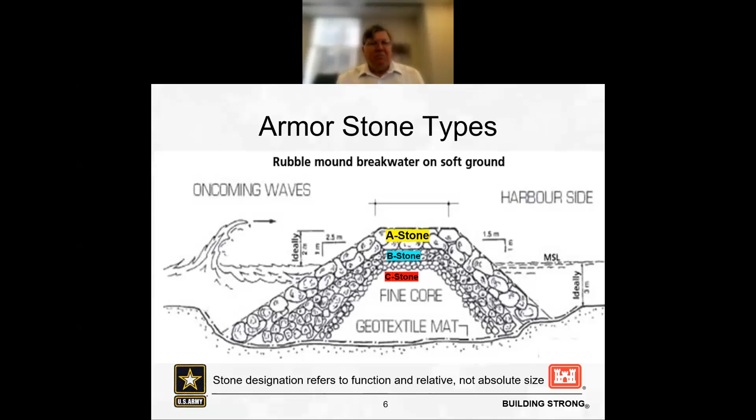Again, A stone is the outermost armor protection. It's the largest stone in the structure, and size and gradation is designed based on Hudson's equation and ice conditions in northern climates, because ice can be an impact on structural stability as well. And the durability is critical because that's the stone facing the most severe environmental stresses.

And the general assumption is that quarries that produce good quality A stone can readily produce B stone or C stone, but the reverse is not always the case because the largest stone has to be free of discontinuities or weak zones that can break down the stone into smaller size in response to environmental stresses.

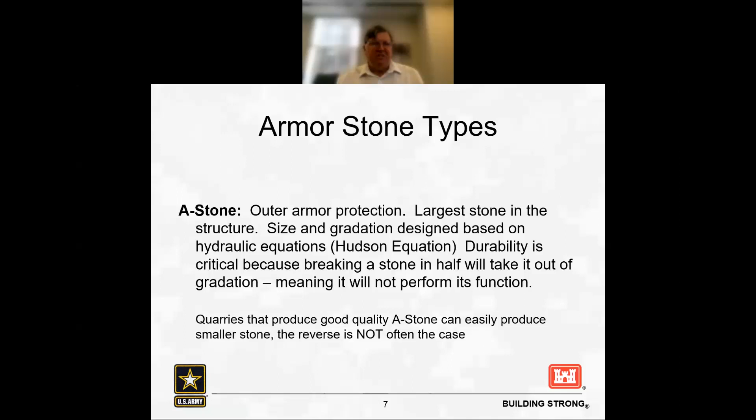Yeah, that's a good idea. I'll put it in the quiz at the end. No, there's no quiz.

B stone is placed as a transition between C stone and the outer layer of armor stone. And gradation is designed using filter compatibility concepts to prevent the C stone from washing through the large voids in the A stone layer. And some B stone sources produce small quantities of larger A stone as a consequence of their production processes, but they don't produce a lot of it.

Sometimes, if they have out of size stone, they'll set it aside and eventually accumulate a large enough stockpile to actually compete market-wise for jobs of appropriate size demands and quantity demands that they've got stockpiled for.

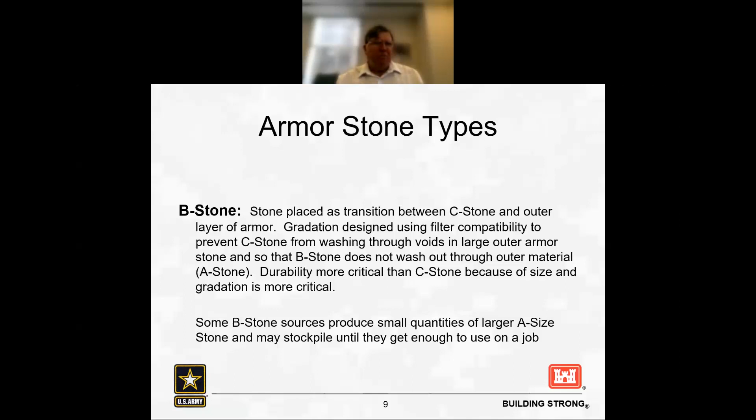C stone is the core stone. It's the base of the structure against the foundation, and it's often riprap sized or slightly larger, not subjected to direct wave action or major current impacts. And it's, like I said, transitional between foundation materials and overlying B stone. Durability is important, but not as critical as in the outer layers of stone because it's not subjected to the same stresses. And C stone sizes are equivalent sometimes to larger riprap stones.

Sizes used by state highway specs are often used to make it easier on suppliers that are used to producing larger quantities of stone for highway department contractors, so that they don't have to reinvent the wheel as far as their grizzly settings or their eyeballing gradations in the quarry.

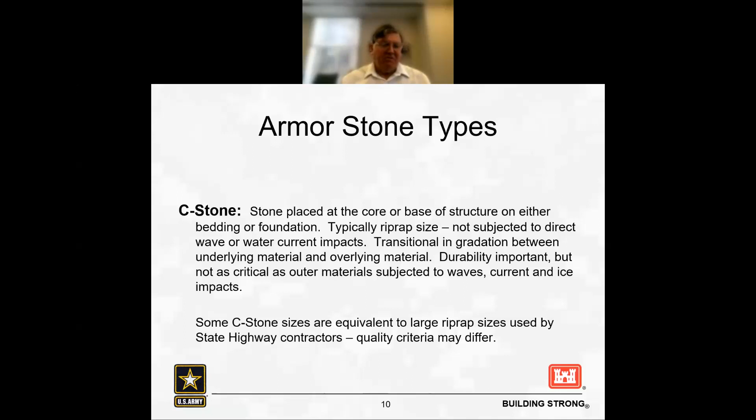Other materials that are related to these: riprap is more commonly used in non-coastal districts along riverways or smaller lake shores where wind may cause waves that erode shorelines. Fillstone is oftentimes not as strictly specified in terms of gradation. It has broader tolerances for stone size gradations.

Ecosystem stone for habitat. Typically, we use rounded stone for creation of man-made ecosystem enhancements where we make riffles in streams or provide aesthetic features in adjacent areas. And then there's concrete aggregate, sand, and clay fill that are sometimes byproducts of quarry operations or primary products depending on the deposits.

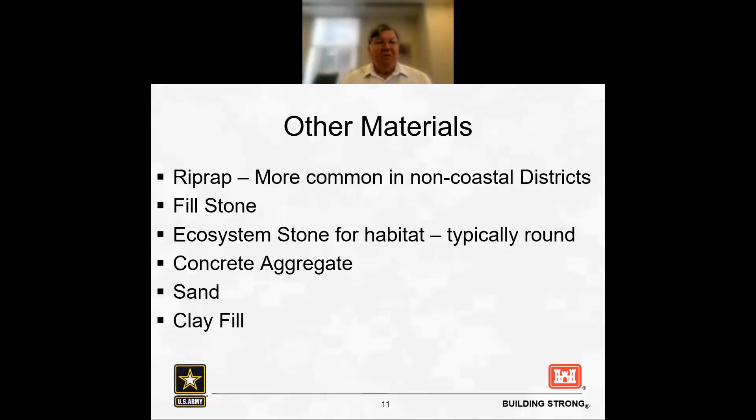Stone shape is important in terms of armor stone use. We want stone to be relatively angular so it interlocks tightly, so the slopes are stable. And for that reason, we go to something with an aspect ratio of 3:1, which is basically the longest axis can be no greater than 3 times the shortest axis. And those axes are generally the longest dimension and the shortest dimension of the stone.

Ecosystem stone for habitat, again, typically rounded with specific dimensions to create habitat for streams. Doesn't have a lot of the same criteria as armor stone. Sometimes we try to reach a happy medium between the two, but for armor stone, we oftentimes have relatively steep slopes, sometimes up to 2:1 or so. And that's simply not possible to have a stable slope using rounded stones.

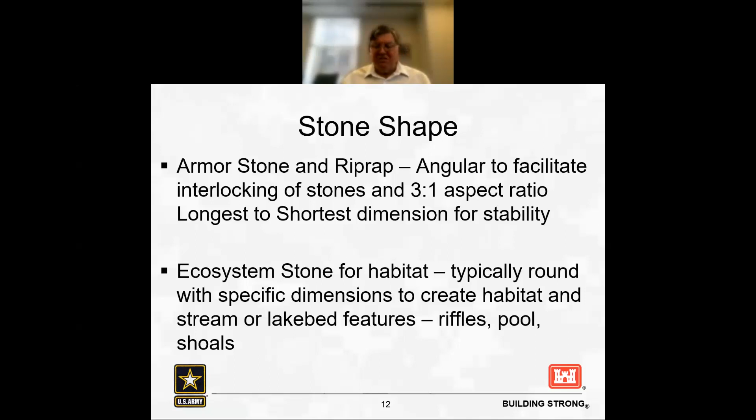Stone contract types are important to consider. Excuse me. We have general construction contracts where armor stone may be part of an overall contract for construction of a shoreline feature or a shoreline revetment or breakwater, but there may be other elements of the contract. Construction contracts can either involve a lot of different things or can be specific to use of armor stone.

But those construction contracts include furnishing, transporting, and placing the stone. And those contracts are written up as a construction contract as opposed to the next type of contract.

Stone supply contracts are written so that we can purchase armor stone that the Corps of Engineers internal maintenance crews will use to repair or maintain structures within our districts with our own equipment and manpower. And so those are just basically stone supply contracts, like we're buying a raw tonnage amount and we'll have it delivered to either a stockpile location, a stone dock along the lakes, or delivered to a project where our crews are actively placing it on a structure.

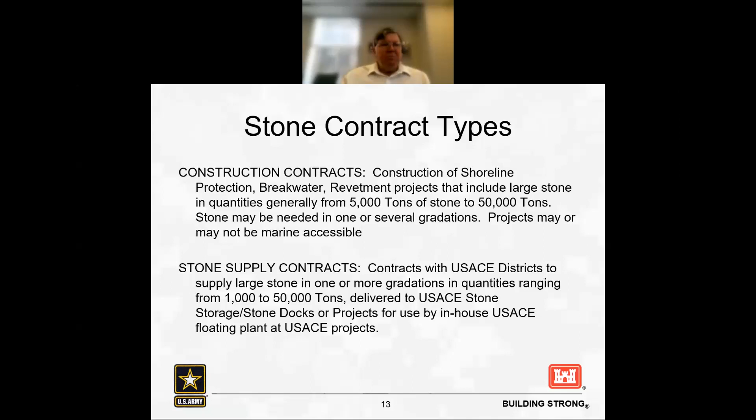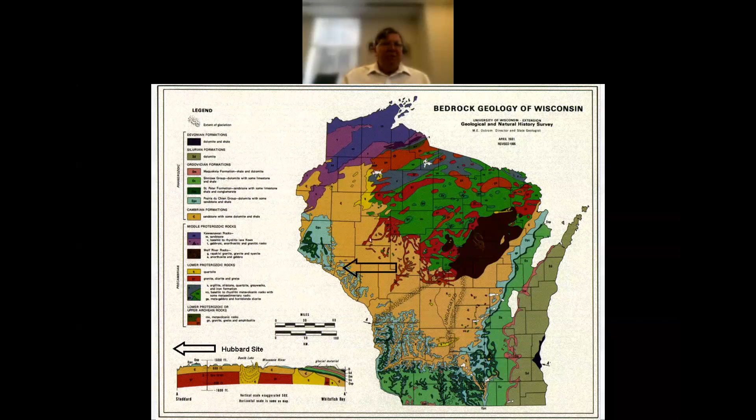And up in the northern part of Wisconsin, we get into what geologists refer to as the greenstone belt, which is some of the very oldest rock on Earth. Some of it's over 1 billion years old. And there is very dense, very hard crystalline rock in those areas. So we have a wealth of different geologic materials available to us from a resource standpoint in the upper Midwest. And it just depends upon how they are developed by quarry and resource providers as to how good that works out.

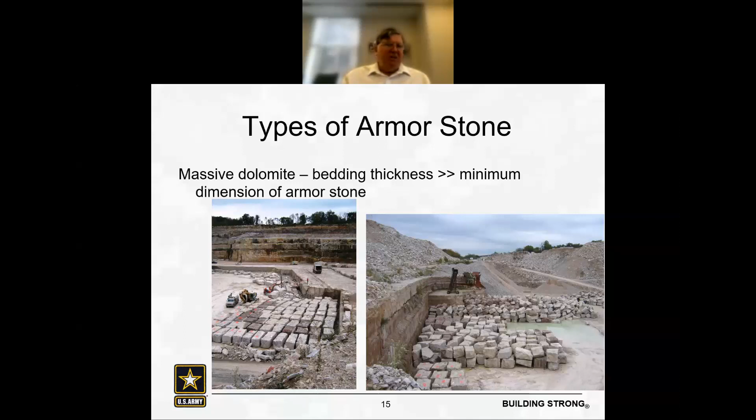We have several types of armor stone we use. These are examples of dolomite, massive, very thick beds of Silurian dolomite in the upper Midwest, in the carbonate deposits. This is from Hayton Quarry, I believe, about 20 miles west of Manitowoc, Wisconsin.

We have different rock types available, like I said, but we still have to have rock types that are free of discontinuities or planes of weakness or weathered features. We prefer, if we're using dolomite, to have it massive with thicknesses at or larger than the minimum dimensions of armor stone, because those bedding planes are going to be planes of weakness along which the stone will break, either during blasting or excavation, or during placement or transportation, or over time in the structure.

Crystalline, or what is colloquially called hard rock, granite, quartzite, andesite, or metavolcanic rock, are rock types in Wisconsin that we've used that are of Precambrian age. They include, like I said, granite, quartzite, and the metavolcanic rock in the greenstone belt.

Some sandstones may be used for armor stone if they're extremely durable and don't have a lot of weakness planes, and some what are called oolitic limestones, typically referred to as Indiana limestone, because they're predominantly quarried in southern Indiana and are used for things like doorstep architectural stone, because they're easily carved and have a somewhat gritty surface texture that's safe to walk on even when it's somewhat wet. But that stone tends to be softer, but it still can be fairly durable in environments where abrasion is not as much a concern.

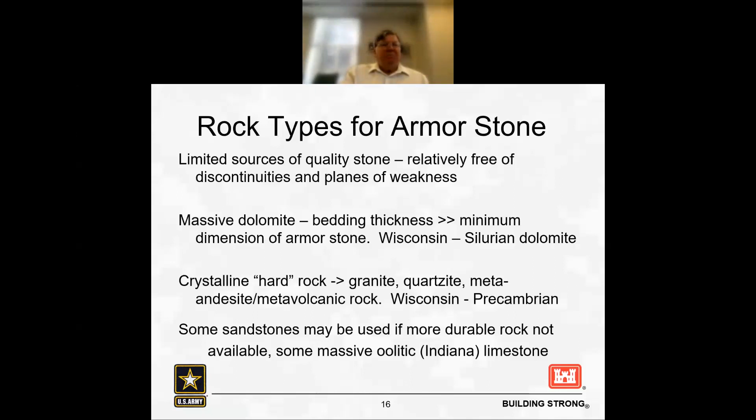Control there. Whoops, something happened here.

Some stone, in addition to being blasted, is cut to size for armor stone. Large cable saws or mechanical saws are used to cut stones that are beyond the 3-to-1 aspect ratio tolerance, or are just simply too large, and were quarried in such a way that you have less blasting impacts, less cracking, less fracturing, and so forth, and they cut them to size. That's a time-consuming process, and the equipment is not as readily available as drill and blast equipment.

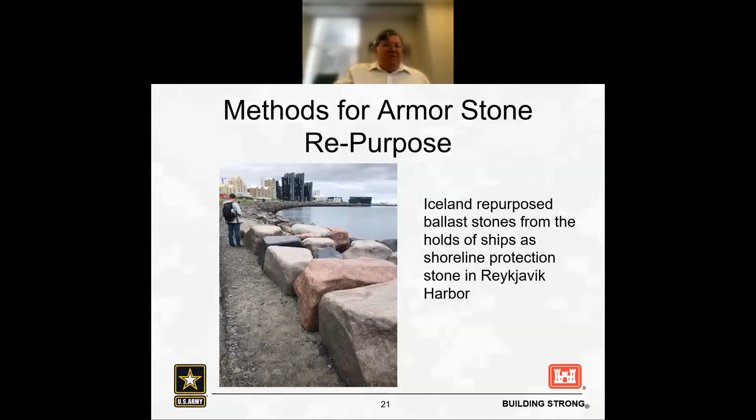Stone is tested in labs for a number of different physical parameters that we use. Laboratory tests used to determine the durability of stone we require come from Corps of Engineers validated laboratories. We have a couple of labs ourselves, but we also permit stone to be tested for our use. It's tested in private laboratories, but the labs have to be validated by our materials testing center.

And there's a list online at this website of laboratories that have been validated by those folks. The website has a listing of laboratories nationwide, listed by state, so you can search by state and find out what laboratories are available in your area that have been validated.

For decades, the Corps of Engineers had laboratories all over the country in its own districts, as well as using private labs. At one time in 1980, there were over 200 lab technicians in the Corps of Engineers itself that did testing all over the country on soil and rock for projects when we were building lots of dams and levees and coastal projects.

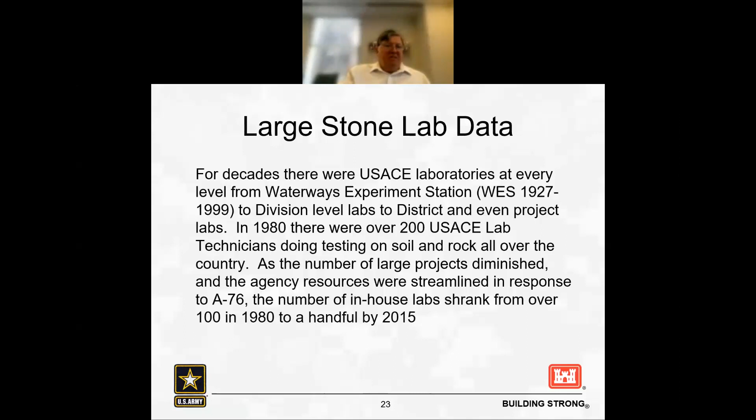Then as the 1980s went on, fewer and fewer large government contracts and projects were being built. There was also a program under the Office of Management and Budget called A76, which was a reflection of political beliefs that the government shouldn't be doing all this testing and that we should turn a lot of that over to the private sector. So the Corps' number of labs shrunk, and a lot of this work was then turned over to private laboratories, and the numbers diminished accordingly.

The Corps of Engineers, up until the very late 90s, had a research center in Vicksburg, Mississippi called the Waterways Experiment Station. And they had the oversight authority of certifying laboratories both within the Corps and validating laboratories in the private sector. They also were responsible for cataloging all the data from these laboratories on materials used in Corps of Engineers projects, whether it was clay, sand, all the way up to armor stone, concrete aggregate, erosion protection, and fill stone. They had massive collections of data every year, and that was compiled by an office down there in Vicksburg, Mississippi.

There is no current agency-wide database identifying sources for Earth materials. There used to be a system of cataloging based out of our Waterways Experiment Station, but in the late 90s, they closed the Waterways Experiment Station, and it was reborn into something called the Engineering Research and Development Center, which had a different laboratory function that, instead of having an annual overhead budget to operate, was operated on a project by project basis and was funded entirely by project funds. So it became less consistent in terms of its manpower, and also a lot of the functionality of the original laboratories fell through the cracks.

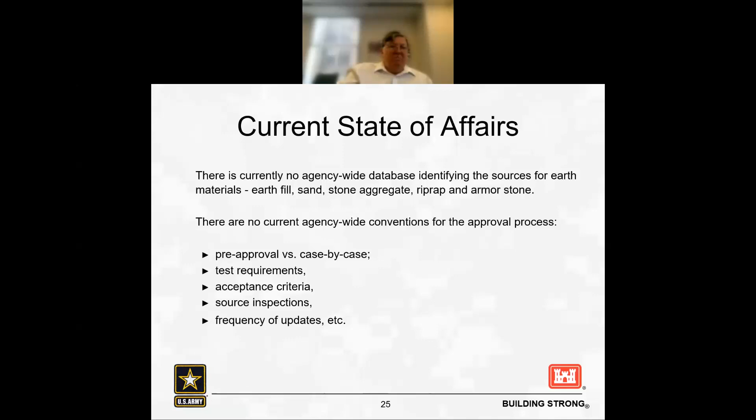And in the Chicago district and in some of the Great Lakes districts as well, the general procedure is that materials are approved on a project-by-project basis because individual project needs vary. Those specifications will include the test requirements, the acceptance criteria, and a process by which we conduct source inspections, and also may include by policy updates to material inspections and testing if necessary.

There's an evolving problem within the agency and within agencies in the government that build large projects. There's a fluctuation in technical expertise within the different levels of our bureaucracy, and we've relied intermittently upon input from the private sector, labs, AEs, and universities, and we also have developed centers of expertise within the Corps of Engineers.

Institutional knowledge and expertise was lost in the 90s as Waterways Experiment Station closed and many of our division laboratories closed, and we downsized as an agency in terms of the technician and laboratory testing, and senior people were retiring and not being replaced with personnel at the same functional level. So we had a brain drain, if you will, as well as a technology drain at the testing level.

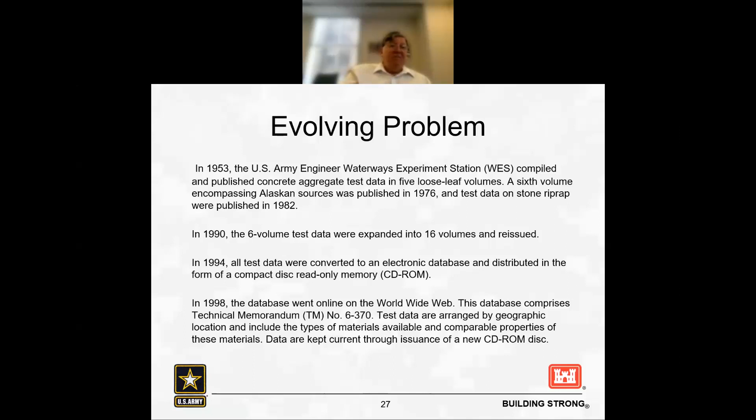And the binders were such that every year the Waterways Experiment Station would send updated test information for each source that they tested. They're, again, drawn out by the 16 volumes by geographical region, and they included aspects of transportation, local knowledge, and similar geology. The reports within them contained a map showing the location of the project, location of the source, and what types of materials and what the test results were for those materials.

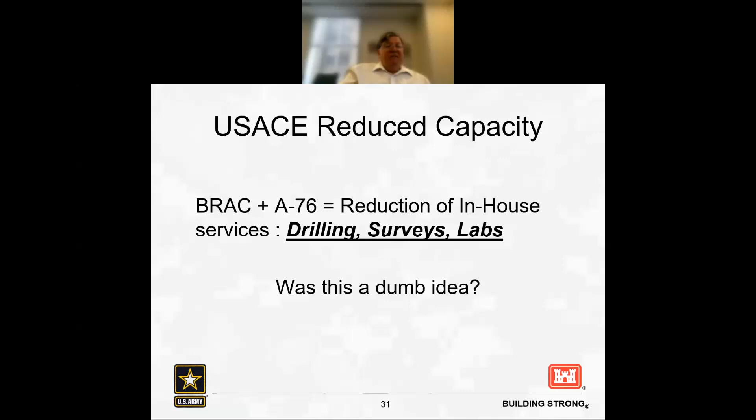And in the late 90s, the combination of the application of A76, which reduced the in-house services of drilling, laboratories, and surveys, along with what was called the BRAC program, the Base Realignment and Closure Program, that reduced the numbers of divisions and districts in the Corps of Engineers, and also the number of military bases. And it cut down a lot on the institutional knowledge within the agency. And the result was kind of a rough transition.

There was an effort in the late 90s to deal with this. Engineering Regulation 1110-1-2005 says that every district is supposed to furnish its test results to Waterways Experiment Station in Vicksburg, Mississippi, but that didn't exist. And there was no funding to execute that regulation. So it is an unfunded mandate to an entity that doesn't exist. So an impossible thing to happen.

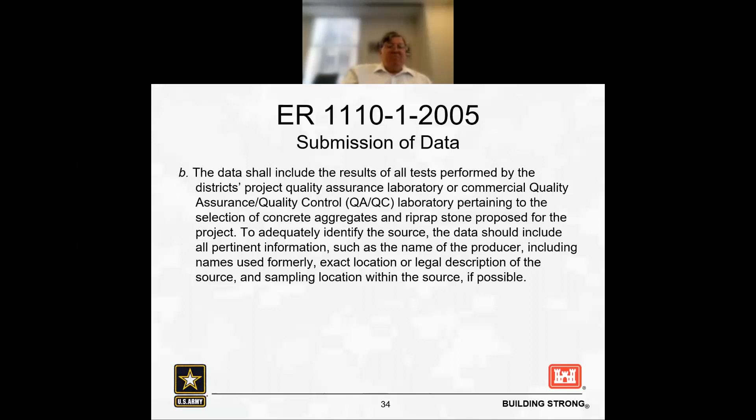Again, this data was supposed to include all the quality controlled laboratory testing and identify the source data with respect to its location and size, production and points of contacts. Basically, everything that we used to do was supposed to be carried on, but it hasn't. The data from each district was supposed to be sent to Waterways Experiment Station within 30 days. And that has never happened because Waterways Experiment Station doesn't exist.

So again, to summarize it, we had the capability in-house to do testing, to catalog that testing, and to track it through a central center of expertise and distribute it to all the entities that needed it. We lost that. And again, we went from a number of district and project funded laboratories to an almost ad hoc arrangement. But all that's kind of history background.

Again, this is leading up to the late 1990s until 2001, because the Great Lakes had a lot of shoreline erosion projects in response to fluctuating lake levels and storm damage in urban areas. And a number of different types of contracts were being initiated by the districts around the Great Lakes, Chicago, Detroit, and Buffalo, and stakeholder agencies like the urban areas along the lake fronts.

A committee was formed to develop standardized specifications and to establish a network among the professionals dealing with these types of issues. And we met quarterly to both discuss issues related to projects and also in an effort to standardize our processes. And the result was that we produced a Great Lakes Armor Stone guide specification that was used as a general template for shoreline erosion protection and revetment designs in the Great Lakes.

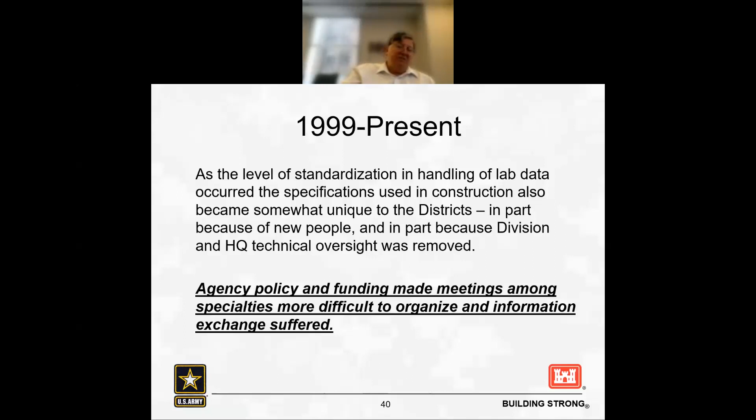The changes in general federal policies with respect to meetings among specialties and reduced overhead budgets and budgets for things like conferences and training affected the information exchange within the agency. And so there became fewer and fewer of us old timers that knew how things were, what sorts of things were out there to be used with respect to things like sand, gravel, resources, and stone.

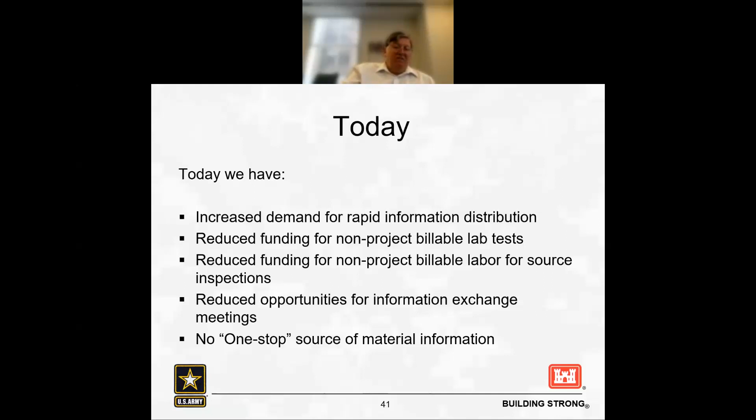So we have an increased demand for rapid information distribution because our contracts are now issued very quickly and designs are being done faster with digital resources and technology. We have reduced funding for non-project billable lab tests or for overhead use. We have reduced funding for non-project billable labor. And we have more limited opportunities for information exchange meetings. So, there's no longer a one-stop source of material information like there was when we had Waterways Experiment Station with the materials experts down there and their catalogs of data on material resources testing.

But that's the history of how we got to where we are. And some of the people on here, I'm sure, are interested in what we do as far as quality control and what our criteria are for armor stone.

So inspection for large armor stone is applied to virtually every stone. It's examined with respect to whether it is within the gradation required, within the general size, and within the aspect ratio. Cracks from blasting and excavation and handling are examined, and if they're significant, they're marked or the stone is rejected.

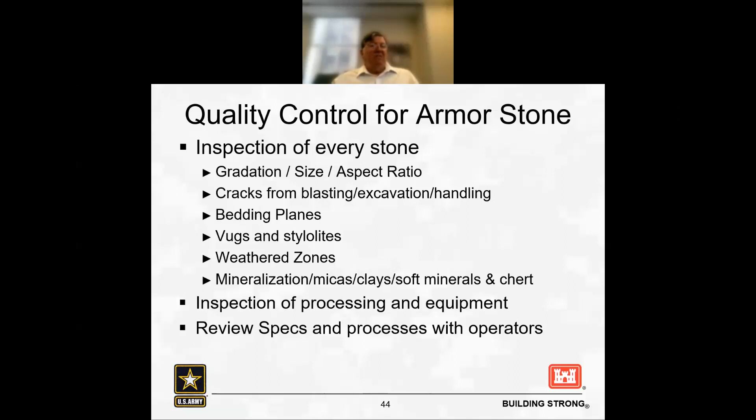Also, the reviews of the specifications and processes with the suppliers and the operators is a means of quality control for the products. Vugs, again, are discontinuities within the stone mass, and chert is a rock type that is prone to taking on moisture and causing stone to fracture, either armor stone, riprap, or concrete aggregate.

And stylolites are these sutured discontinuities within rock that can be planes of weakness and cause it to break. Laboratory test data that's used for determining whether armor stone is acceptable include determinations of specific gravity and absorption.

The Los Angeles abrasion test is a test in which stone pieces are mechanically turned in a drum with steel balls, mill balls, to see what kind of durability is exhibited in rotations. And freeze thaw tests, where you take a slab of rock that's been cut, and freeze it, thaw it. And wetting and drying is basically the same thing as freeze thawing, except instead of freezing and thawing it, you're wetting and drying it.

And then we have a standard practice for field examination in which we determine whether or not there are deleterious or unacceptable materials contained in the rock mass. We expect generally that laboratory results must be representative of the rock type furnished, must be 5 years or younger from the date the testing was done to the contract date, and must be done from a USACE validated laboratory.

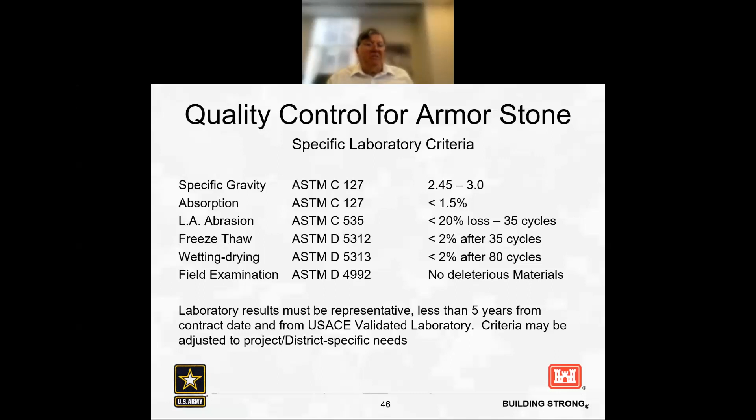The service records that we require for our analysis of a project are records of basically the material's track record. Has it been used recently in other projects that are similar? Similar in scope? Has the source had to provide material of the same quality and quantity as the project that we're trying to build?

And the advantages to that are twofold. One is that it's more durable in the project environment. The other is that it's more durable during handling and processing, and because it is more durable and massive, adherence upon QC inspection is less critical, and consequently it gives us greater peace of mind in terms of the durability of the material in the long term.

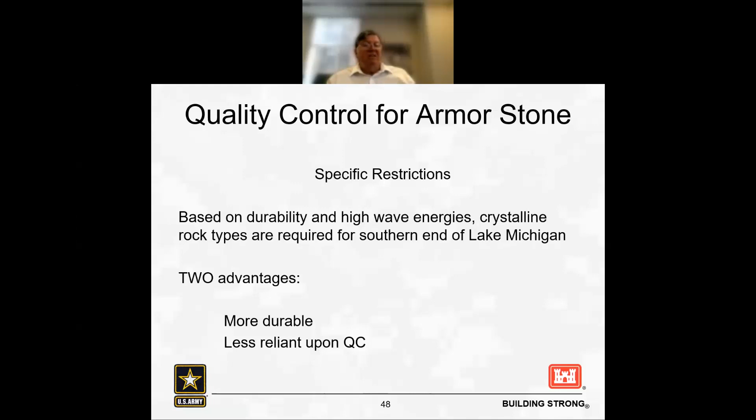The quality control for armor stone also involves major considerations of cost, market factors, and supply and demand. Transportation costs are extremely significant to earth material sources, because you're talking about large volumes of material, often transported great distances. So fuel cost is a relevant cost concern, and order size accordingly. Less important cost considerations might include stone type and the season in which we require the material.

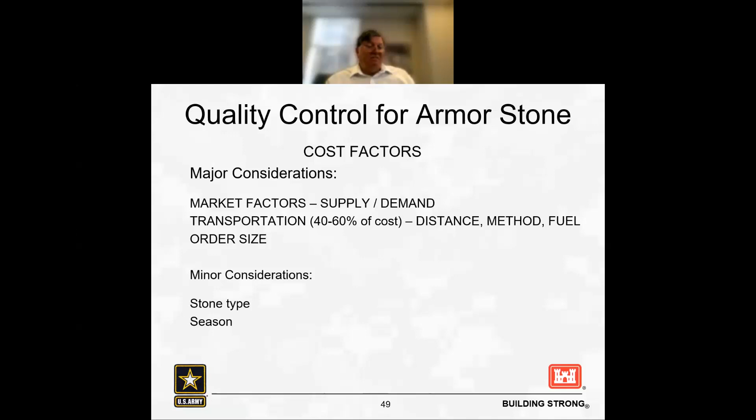Most suppliers have some stockpile on hand, but there may be difficulties with that depending upon circumstances like COVID or even seasonal workforces, and they can't quarry stone under as great a control in areas in the upper Midwest because stone behaves differently when it's blasted in frost zone areas versus non-frozen ground areas.

The costs for armor stone have varied quite a bit over time since I've come to the Chicago district. When I was here in 2001, armor stone was in the range of $35 to $40 a ton. It's gone up significantly, and most recently in some places it's gone up over $150 a ton because of cost considerations, maybe of workforce, maybe of transportation costs, or even equipment costs because much of the equipment was difficult to find parts for during COVID. All the other post-COVID price chaos we've encountered that really nobody has found a magic equation for yet.

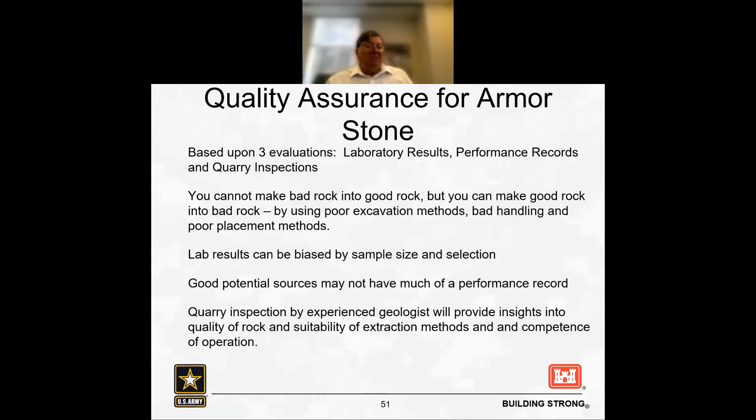The source evaluation approval or rejection is hopefully done in a timely, objective, and consistent manner within the specifications. We have strived to eliminate any biases based on the human factor. And we recognize that the staff and the equipment of quarries vary over time. If a quarry produced poor quality stone 20 years ago and they've made improvements in staff, equipment, and processes, that has to be taken into consideration.

These processes include reviews of laboratory test results, comparing them to specifications, review of work plans, quality control plans of the contractor with respect to the provisions of the specifications.

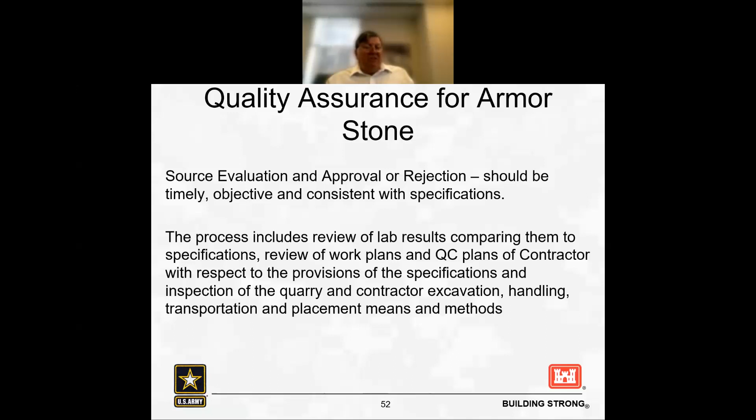So we've got climate change with aging infrastructure, and we will have needs for armor stone and riprap and large quantities of earth materials to repair, maintain, and improve infrastructure in this country. And we, as an agency and as a federal government in general, need to better understand where these materials are, what the quantities are, what the quality of the material is, and how quickly it can be transported to areas where it's needed.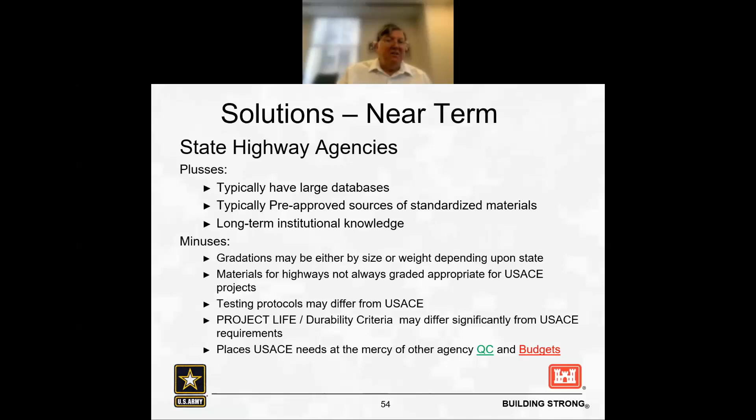It requires communication among agencies to do that, and highway department budgets and our budgets are independent of each other, so we don't have that commonality of functionality. They have large databases, and we use them a lot.

We have some long-term and midterm expectations. I've been putting this engineering regulation on the docket every time that we've met as a community of practice among geologists and geotech engineers nationwide. It's out of date and it needs to be revised. We also have a rough plan for a Corps-wide web-based materials database GIS system that would link test results and material sizes and types to a point-and-click type map where you could point on a location and say, I want to know who has this size material within 100 miles of the site, and that sort of thing.

We need to coordinate with industry. We need to maintain communication with industry. And we need to be more consistent across the agency nationwide and within the regions so that there isn't confusion or conflict among districts as to what is and isn't acceptable material. And that pretty much is my wrap up.